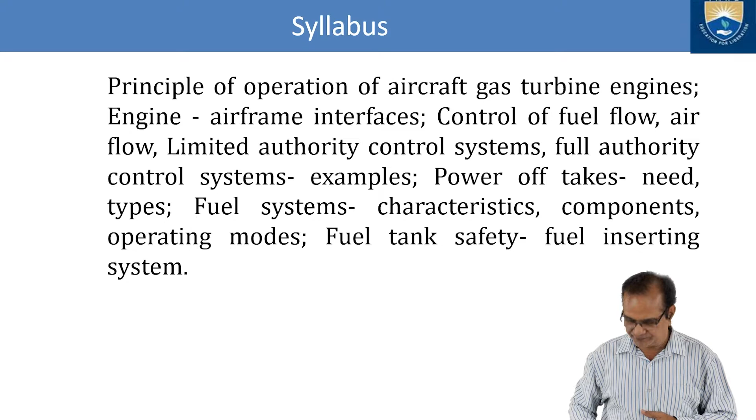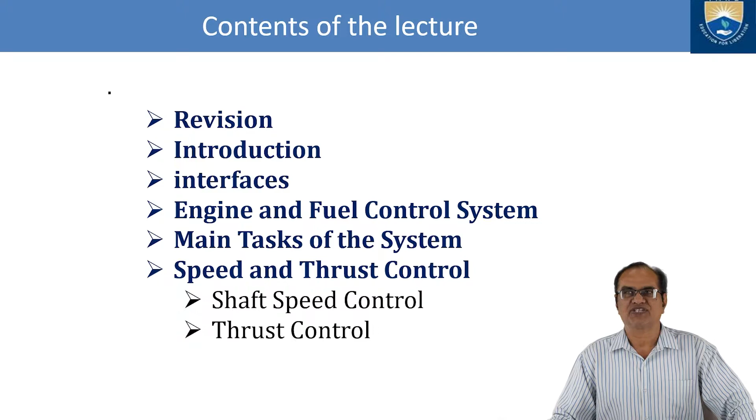In today's class, I am going to cover the revision, then introduction, interfaces, engine and fuel control systems, main tasks of the systems, speed and thrust control, shaft speed control and thrust control. So these topics I am going to discuss.

First I am going to take up the revision of the previous classes. In this revision we have seen that there are 4 pillars of aircraft systems: first is the airframe or structural system, another is vehicle system, third is avionics system, and fourth is mission system. These are the 4 important pillars on which the building of the aircraft rests.

If you take the first pillar, it is the airframe systems or airframe and structural system. In this we have the wing, another is the empennage, and third is the fuselage. Next one is the vehicle system. The vehicle system consists of the fuel system, propulsion system, flight control system and hydraulic system.

You might have seen that we have covered the hydraulic system, but the fuel system and propulsion system will be covered in this module, module number 4, and the flight control system will be covered in module 5, the last module. So we are going to cover these, and I am going to assume that you are all aware about the propulsion system and the fuel system.

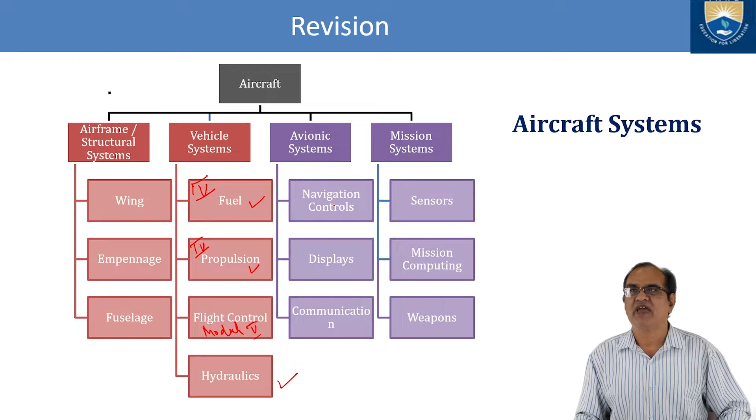Now I will discuss some components of the aircraft. I will start from the cockpit, where the pilot sits. Here all the instruments, navigation and communication equipment are fitted, and all displays are here.

This full body is the fuselage. Then we have the slats here, which increase the lift. We have the spoilers here, which change lift, drag, and the roll.

Then we have the aileron. The function of the aileron is to change the roll of the aircraft. Then we have the flaps here, here and here - these are the flaps, and this one and this one are the ailerons. These are the winglets, and here is also a winglet. The purpose of the flaps is to increase the lift and the drag of the aircraft.

Then we have the elevator. The elevator is used to change the pitch of the aircraft, meaning it will make the nose go up or down - like this.

The rudder is deflected to make the aircraft yaw towards the left or right side of the pilot. The vertical stabilizer controls the yaw - it is used to stabilize the yaw motion, meaning there should not be an immediate reaction. If you apply the rudder, after deflection it should maintain the proper position. Then we say the aircraft is statically stable in the yaw axis.

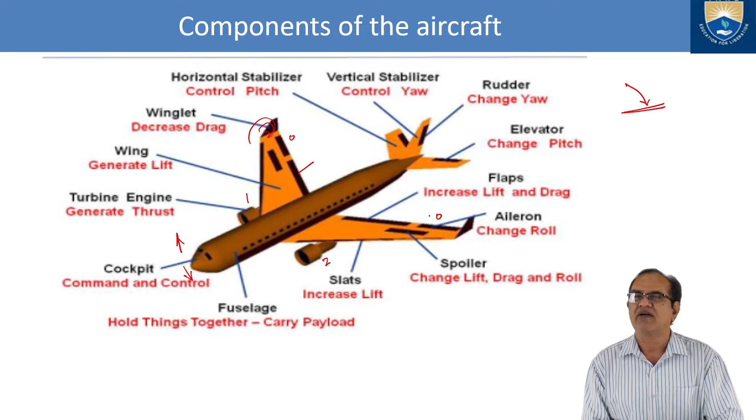Next is the turbine engine here - you can see turbo engine 1 and turbo engine 2. These are the engines, and now I have completed all the parts shown here.

Now I will discuss the airframe system. If you talk about the airframe system, we have three main components: 1, 2 and 3. The first one is the wing, and the wing has got so many components - here this is the airfoil, and then the center wing.

Then we have the exterior plate doubler, then the landing gear fitting, trailing edge, inboard flap, flaps, vane, spoilers, inboard ailerons, outboard ailerons, flaps - these are all part of the wing.

If you talk about the fuselage, we have section 1, section 2, section 3 and section 4. Section 1 is called the forward section, and section 2 is called the mid section.

Then section 3 is called the aft section, and this is called the afterbody. The afterbody is also called the empennage. So the empennage is also part of the fuselage, but it is the last part of the aircraft. The third part is the empennage. The empennage consists of the afterbody.

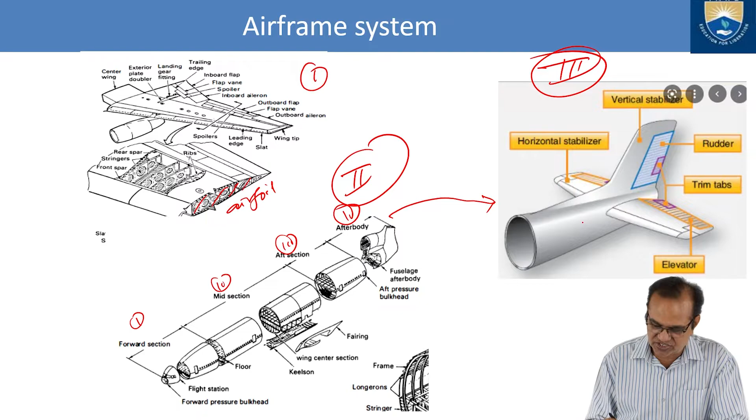This is your afterbody here, and then it consists of the horizontal stabilizer. Then it consists of the rudder. Then it consists of the trim tab. So these are the parts of the systems.

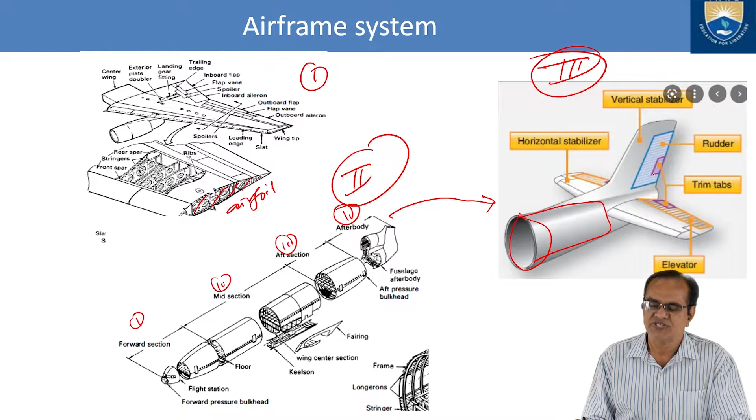Now, vehicle system. If I talk about the vehicle system, you can see here in the video how this animation is moving. So here are the flight controls. If you see here, these are the controls. If you want to roll, your aileron has to go up and down. And if you want to pitch, your elevator has to go up and down here. These are the pitch here.

And if you want to yaw, then you have to use your pedals. I will show you here how the pedals work. These are the pedals, and these are pressed by the pilot. So here we have the primary flight controls: roll, pitch and yaw. Just now you can see in this animation how this aircraft is moving left, right, up and down, or yawing. Secondary flight controls are the high lift controls, flaperons and the slats, and then we have the speed brakes.

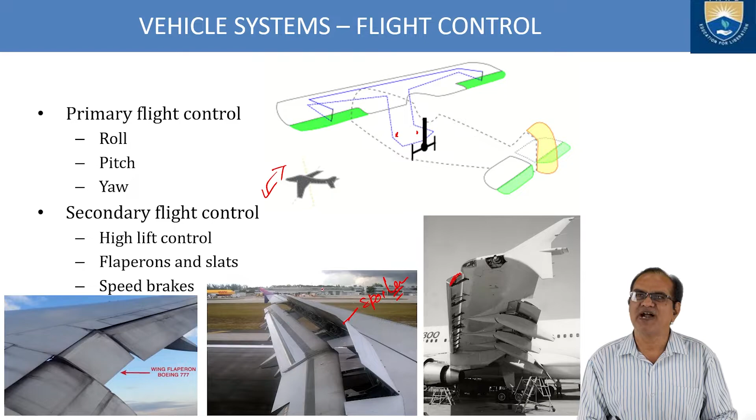So these shown here are slats. These are the slats, here. If you see, these are the air brakes, spoilers. Okay, wing flaperon, Boeing 777, and all these parts are shown in this slide.

Next vehicle part is the propulsion system. We are here in module 4, and in this we will be discussing the propulsion system of the aircraft. I will not go in much detail, but we should understand that the propulsion system is also part of the vehicle system. And propulsion means what? It has to pull the aircraft. It has to make the motion. So locomotion is performed with the help of the aircraft propulsion system.

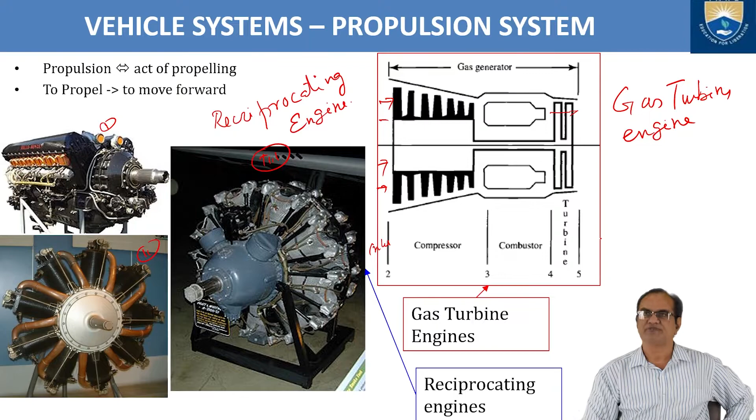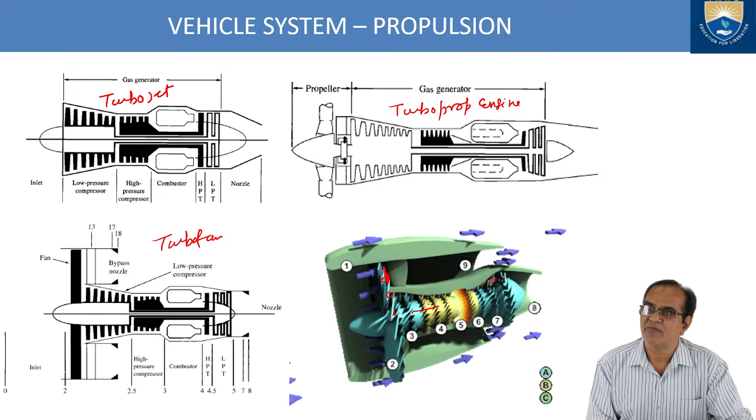Air is entering from this side, and some part of this air is bypassed by the turbofan and some part enters the main engine. This is your main engine here. Here is the compressor. By the color you can see that pressure is increasing. Here the red color shows high pressure, and after that the combustion takes place in this zone. In the combustion zone, high temperature, high pressure air enters the turbine. So these are the zones: 2, 3, 4, 5, 6, 7, 8.

So 2 is your fan, 3 is your low pressure compressor, 4 is your high pressure compressor, 5 is your combustion chamber, 6 is the high pressure turbine, and 7 is the low pressure turbine. So the basic concept of the turbine is shown with the help of this animation, which I have taken from the internet. It is not mine. I will give credit to the person who made this animation.

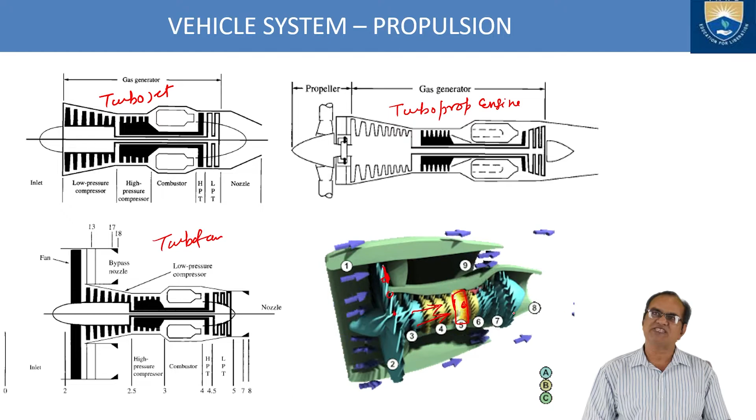Now in the vehicle system, after this engine system, we should also have the fuel system. I will be discussing this fuel system in detail in due course of time. This fuel system provides a reliable supply, ground refueling, ground defueling, in-flight function. It gives the fuel transfer, engine feed, fuel measurement, fuel management, fuel jettisoning.

So here I have shown the fuel jettisoning, how this fuel is jettisoned. If during landing the aircraft is not properly balanced... So we have to make sure that the aircraft is balanced during landing, and if on any one side the fuel is more, that side's fuel is jettisoned or removed. In some aircraft this is done automatically, and in some aircraft the pilot will operate the jettison system and the fuel will be jettisoned.

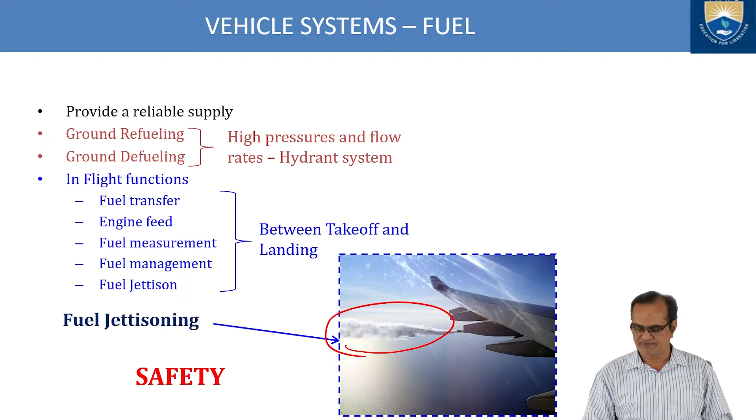Now here is a new topic which I am going to take you through for module 4. Here I am going to talk about the engine control system. This allows the engine to perform at maximum efficiency for a given condition. So this engine control system, what is the purpose? It allows the engine to perform at maximum efficiency. Everything should work at maximum efficiency for a given condition. It aids the pilot to control and monitor the operation of the aircraft power plant.

Originally, the engine control system consisted of a simple mechanical linkage controlled by the pilot, then evolved and became the responsibility of the third pilot, a certified crew member, the flight engineer. So if you see the old aircraft, I have seen the IL-38 in the Indian Navy and the Tu-142M. Both aircraft had one additional person, which is called the flight engineer.

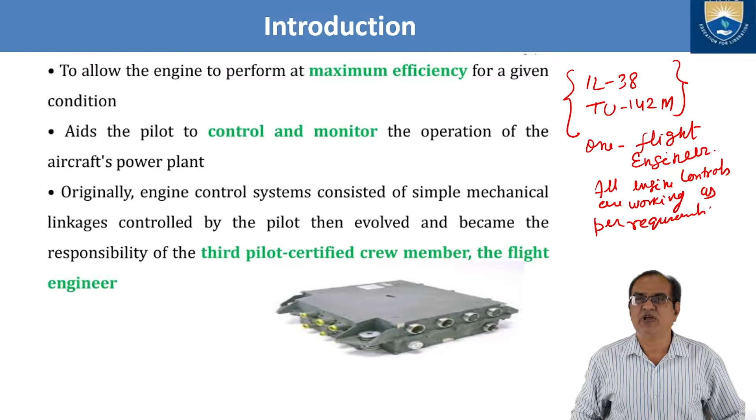This is the person who is the engineer; he is not the pilot, but he is flying with the pilot, and he is making sure that all engine controls are working as per requirements. Okay, so the engine control system previously consisted of a simple mechanical linkage operated by the pilot, then evolved and became the responsibility of the third pilot, certified crew members, the flight engineers.

By moving a throttle lever directly connected to the engine, the pilot or the flight engineer could control fuel flow, power output, and many other engine parameters. What is the purpose of the flight engineer? He will maintain that fuel flow is as per the requirement. Next, he will maintain the power output of the engine as per the requirement, and many other engine parameters the flight engineer has to monitor, and he or she has to make sure that these parameters are maintained inside the aircraft so that the aircraft performance is achieved as per the given standard.

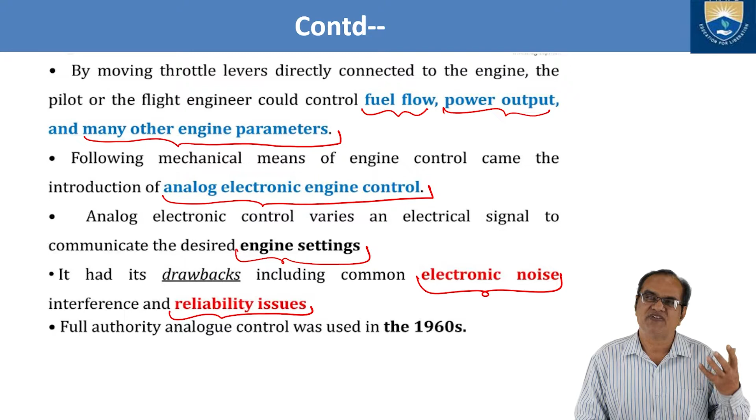Following mechanical means of engine control came the introduction of analog electronic engine control. After that, analog electronic engine control came, and it made the electronics work. Analog electronic control varies an electrical signal to communicate the desired engine setting. So it works with the help of the electric signal. It had its drawbacks, including common electronic noise interference and reliability issues. So it had reliability problems, and also some disturbance or noise, which is interference due to electromagnetic waves and others.

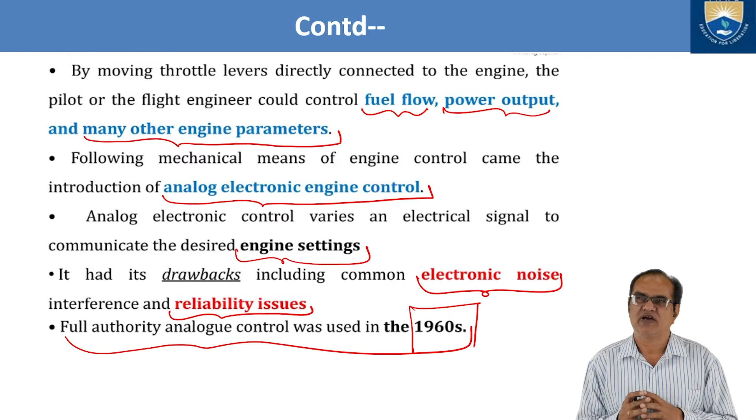So now full authority analog control came in 1960. The first electronic control with all the parameters which can be controlled came in 1960. In 1970, NASA and Pratt & Whitney experimented with the first experimental FADEC, full authority digital electronic control. What is the FADEC? It is a full authority digital engine control. First flown on the F-111, fitted with a highly modified Pratt & Whitney TF30 left engine.

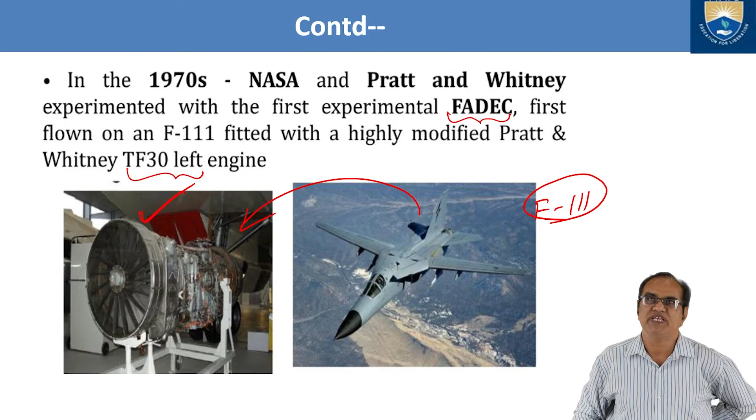So this is the TF30 engine which is shown here. This is the TF30 engine, and this is the F-111 aircraft. In this aircraft, this engine has got the full authority FADEC system. It was used in 1970, and it was developed by NASA and Pratt & Whitney of the USA.

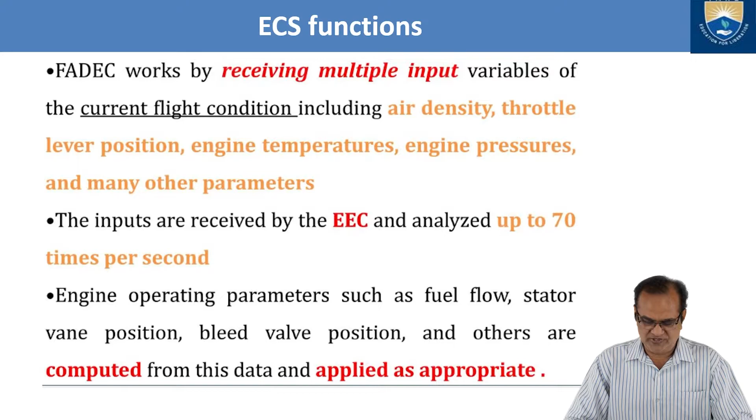Now, electronic control system functions. What are the functions of the electronic control system? FADEC works by receiving multiple input variables of the current flight condition, including air density, throttle lever position, engine temperatures, engine pressures, and many other parameters. The inputs are received by the EEC and analyzed up to 70 times per second. Engine operating parameters such as fuel flow, stator vane position, bleed valve position, and others are computed from this data and applied as appropriate.

It controls engine starting and the restarting of the engine. This FADEC, what is that? FADEC means full authority digital engine control system. This makes sure that starting and restarting is controlled properly.

Its basic purpose is to provide optimum engine efficiency for a given flight condition. So another function of this thing is to provide optimum engine efficiency for given flight conditions. It also allows the manufacturers to program engine limitations and receive engine health and maintenance reports.

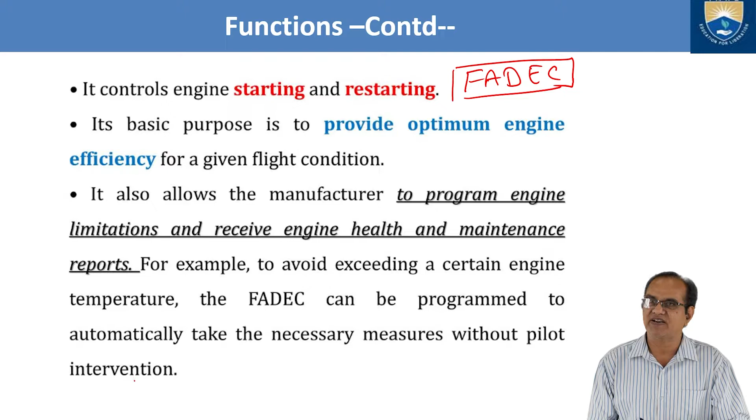For example, to avoid exceeding a certain engine temperature, the FADEC can be programmed to automatically take the necessary measures without pilot intervention. So this FADEC will do its own automated work, but we have to program under what type of condition it has to work. So how does it work, how will your FADEC work?

The flight crew first enters the flight data such as wind conditions, runway length or cruise altitude into the flight management system. The flight management system uses this data to calculate power settings for different phases of the flight. At takeoff, the flight crew advances the throttle to a predetermined setting or opts for an auto throttle takeoff if available. The FADEC now applies the calculated takeoff thrust setting by sending an electronic signal to the engine.

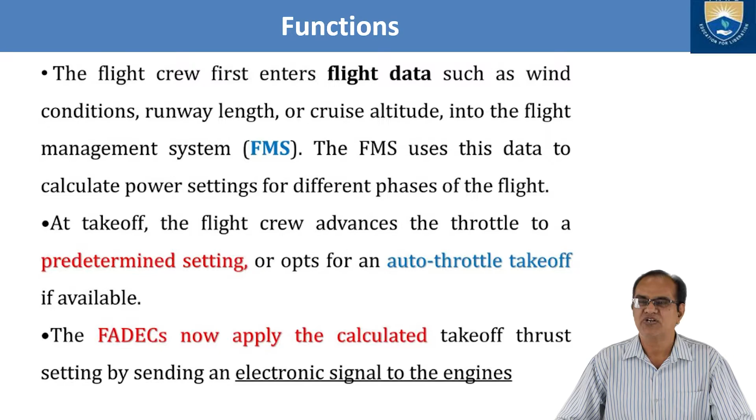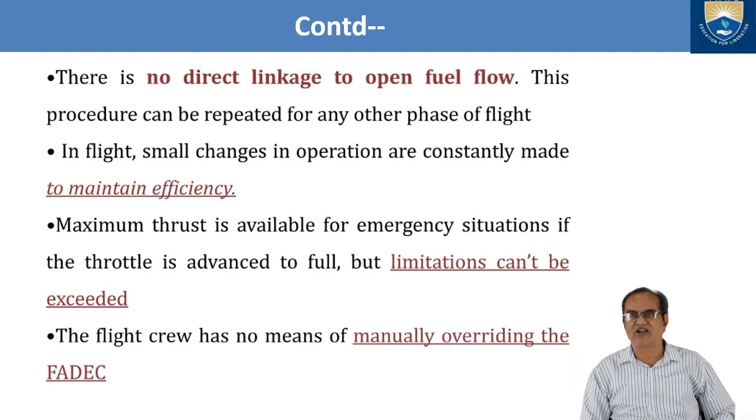There is no direct linkage to open fuel flow. This procedure can be repeated for any other phase of flight. In flight, small changes in operation are constantly made to maintain efficiency. Maximum thrust is available for emergency situations if the throttle is advanced to full, but limitations cannot be exceeded. The flight crew has no means of manually overriding the FADEC. Once it is programmed, the flight crew will not have any control over the FADEC system.

True full authority digital engine controls have no form of manual override available, placing full authority over the operating parameters of the engine in the hands of the computer. The pilot, the co-pilot or the flight engineer don't have any authority or any interference on this FADEC system. The FADEC system will work as per the given input and no one can interfere with that.

If a total FADEC failure occurs, the engine fails. That is a major drawback. So if the FADEC fails, the engine will also fail. If the engine is controlled digitally and electronically but allows for manual override, it is considered solely an EEC or ECU. So what is the difference between the FADEC and the EEC or the ECU, electronic control unit?

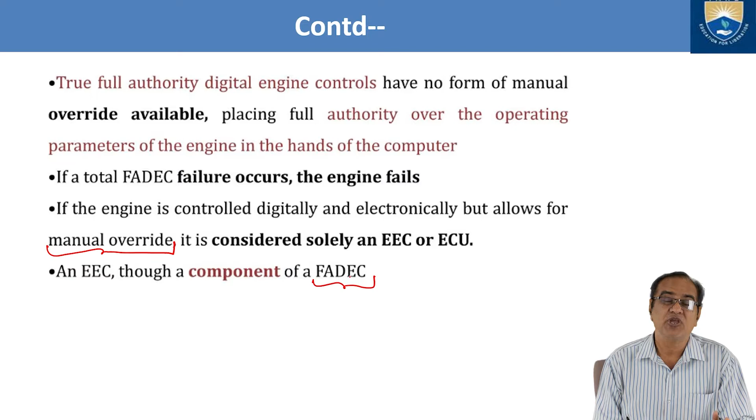In this, the engine is controlled digitally and electronically but allows for manual override. So if this system is there, it is not called FADEC. It is called only EEC, electronic engine control, or electronic control unit. And the EEC is a component of the FADEC. There are a number of parts in the FADEC; the EEC is one part, and the FADEC is controlled by a fully computerized system by the flight management system of the aircraft.

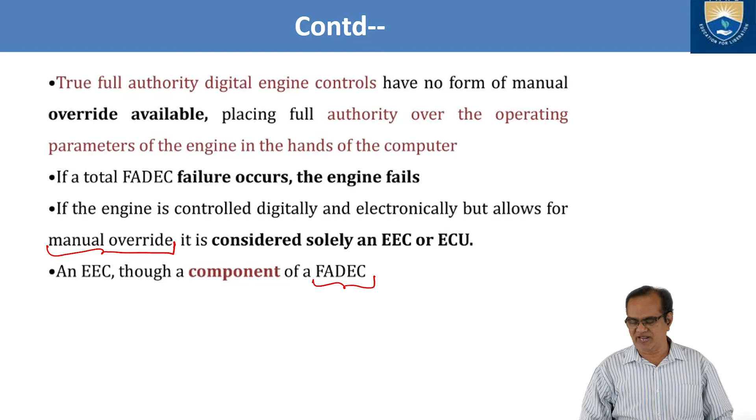So what are the applications of electronic control systems? Till now we have seen how it operates and what its functions are, but what are the applications of this engine control system? FADECs are employed by almost all current generation jet engines and increasingly in piston engines for fixed wing aircraft and helicopters. So now it is used for piston engines, for helicopters, everywhere.

The system replaces both magnetos in piston engine aircraft, which makes costly magneto maintenance obsolete and eliminates carburetor heat, mixture control and engine priming. So FADEC has made the piston engine very efficient. Magnetos need a lot of maintenance and cleaning. Every 200 or 300 hours of flying, you need to remove the magnetos and clean off the carbon or any other particles which have accumulated.

Otherwise, it will not give proper efficiency. The engine will not perform as per the required standard. All these things are eliminated with the help of FADEC. Also the carburetor heat.

Every piston engine will have the carburetor. In the carburetor, you mix the fuel and the air. It has to give a proper ratio. And this maintenance is also very difficult. By using the FADEC, all these maintenance issues are solved.

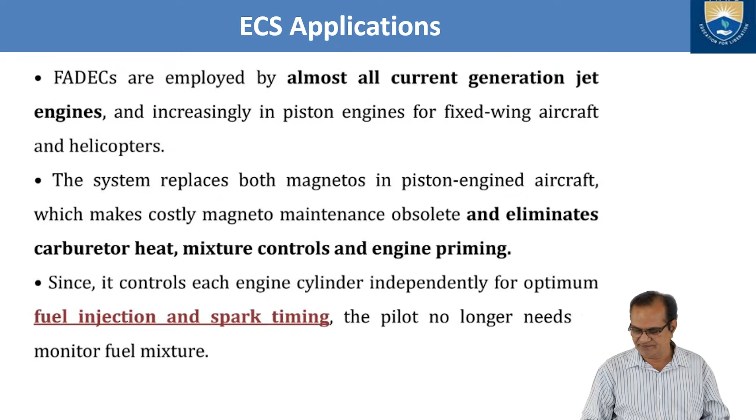The flight management system makes sure that the spark is given at the exact required timing of the engine. So all these things are performed, and these applications are done by the ECS.

What are the advantages of the electronic control systems? Better fuel efficiency, automatic engine protection against out of tolerance operations, safer as the multiple channel FADEC computer provides redundancy in case of failure, carefree engine handling with guaranteed thrust setting, ability to use a single engine type for a wide thrust requirement by just reprogramming the FADEC, semi-automatic engine starting, and better system integration with engine and aircraft systems.

So these are the advantages. First, it gives better fuel efficiency. It means the fuel consumption is reduced. So how is the fuel consumption reduced? Because it gives the correct timing of the spark plug, as I just told, and it gives the correct air to fuel ratio. All these things make the engine very efficient.

Automatic engine protection against out of tolerance operation. Suppose your engine is to operate at 400 degrees centigrade, and due to some problem the temperature has reached 500 degrees centigrade, it will protect. There are some mechanisms that will try to bring the engine back within the required limitations. Tolerances should be within the limit. So that is the purpose of the FADEC, and FADEC makes this perfect.

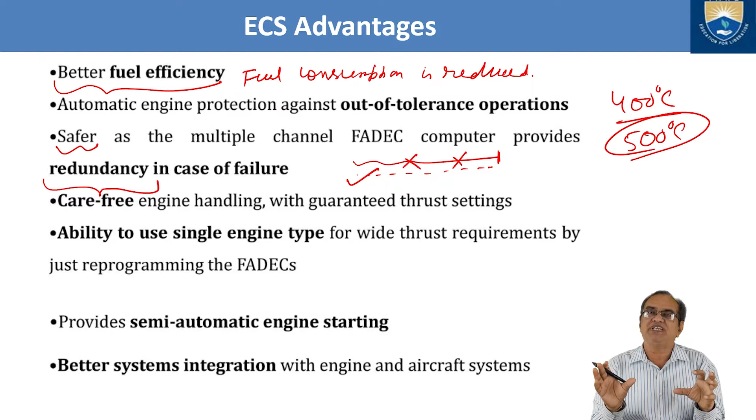Carefree engine handling with guaranteed thrust setting. You know that at a particular altitude, speed, and weight of the aircraft, we need a certain amount of thrust from the engine. This engine will make sure that in those conditions, the required amount of thrust is produced. So the aircraft will fly at optimum conditions where fuel consumption is reduced and optimum fuel consumption is maintained by the FADEC system.

Provides semi-automatic engine starting. Sometimes if you want the pilot to interfere during starting, there is a provision. If the pilot sets that knob, the pilot can start, or it will be an automatic setting. This can be done.

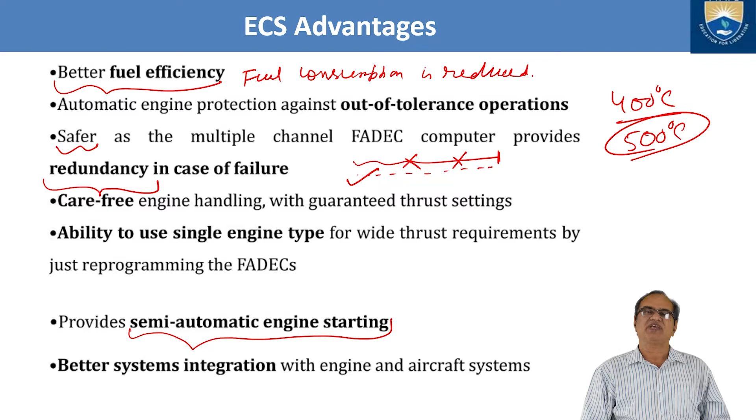Better system integration with engine and aircraft systems. It makes better engine integration with aircraft fuel systems, the fuselage, wings and other things. A better condition can be achieved. So these are the advantages of the electronic engine control system.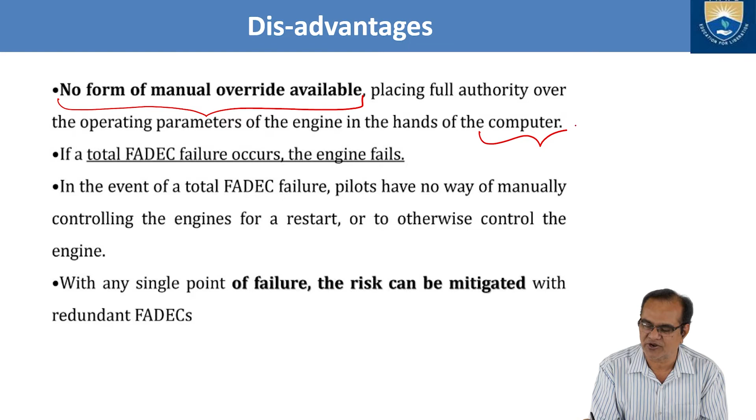But everything is not good. If you have something good, there will be something bad. So we also have to see what the disadvantages of the FADEC system are. No form of manual override is available. Once it is set, you cannot do anything; only the machine will do it. It places full authority over the operating parameters of the engine in the hands of the computer. Everything is controlled by the computer, with no human interference.

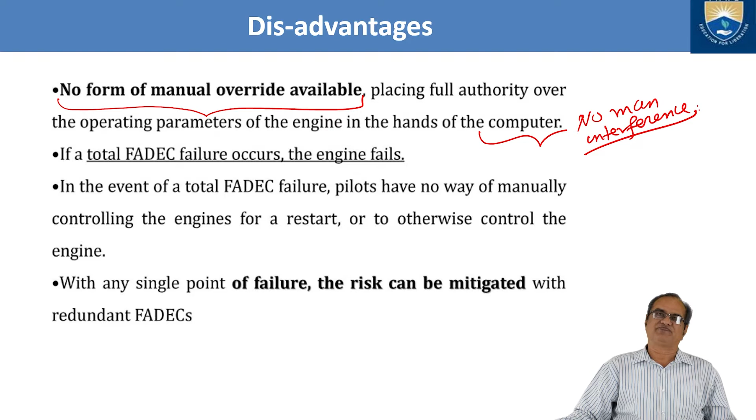No interference is needed at any level. If a total FADEC failure occurs, the engine fails. So, if the FADEC fails, no one can save the engine. The engine will 100% go bad. In the event of total FADEC failure, pilots have no manual way. The pilot cannot do anything. The pilot has no option.

Okay, so the pilot has no option. So that is the drawback of this system: manually controlling the engine for a restart or to otherwise control the engine. With any single point of failure, the risk can be mitigated with redundant FADEC. So the risk can only be mitigated by the given standby system, not by the pilot.

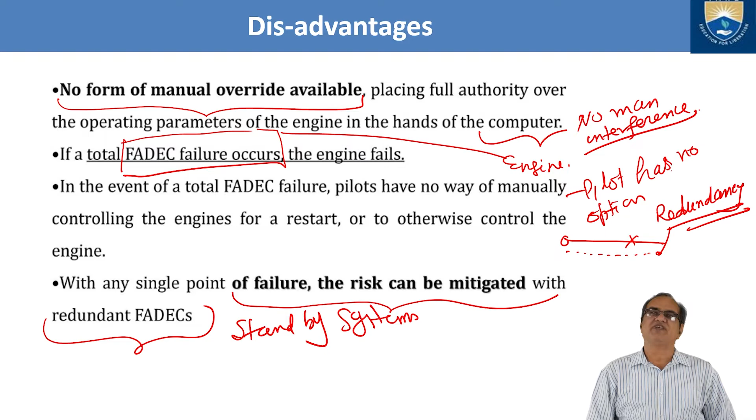A redundant system is what? Standby systems, as I have told just now. If you have one system to operate this lever and it fails, there is another parallel system which will operate for the time being. This is called redundancy. So the redundancy of this system is quite high, and so these are some of the disadvantages.

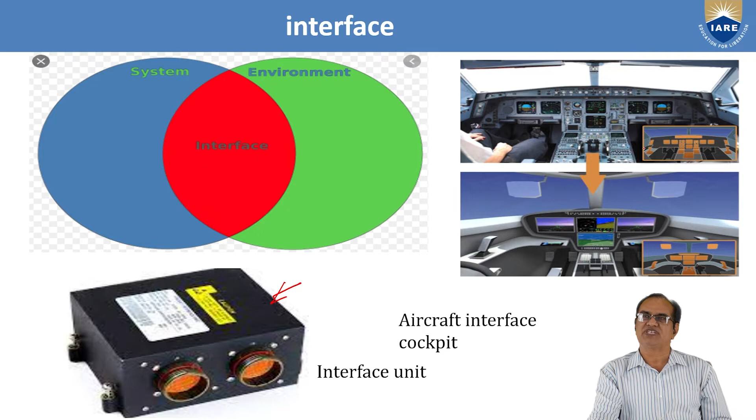So now I will talk about the interface. What is the interface and how are these things working? How are your engine control systems interfaced with the aircraft? The system here is the environment, and there is an interface, called the interface unit, the aircraft interface. Here is the pilot. So your engine, your environment, and there is an interface. This unit makes sure that what the pilot wants is obtained by the engine. Here in this cockpit is the pilot, and the pilot makes sure that the systems are interfaced properly and he or she is able to perform as per the required standard.

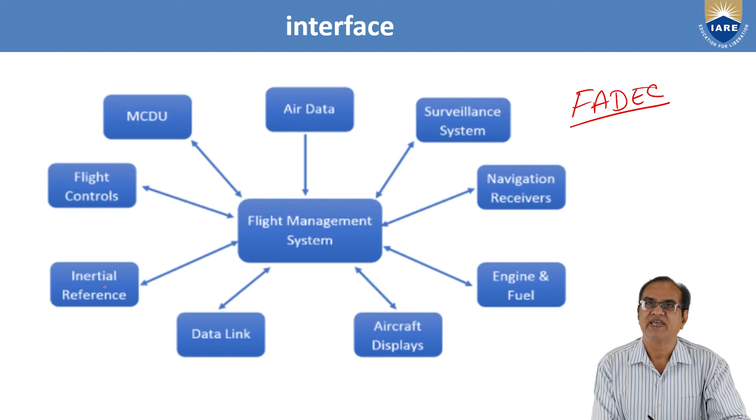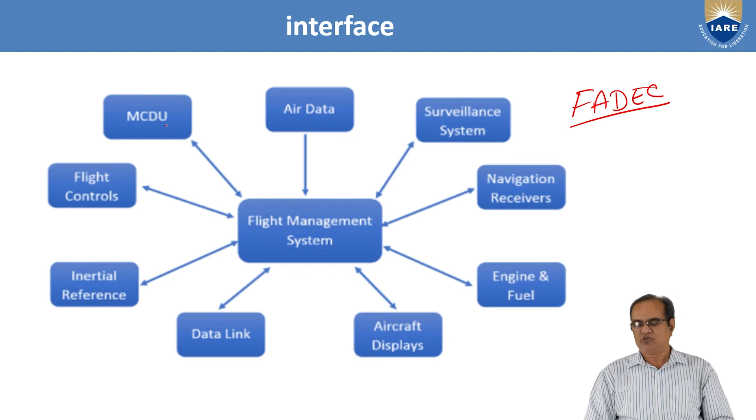For the interface, we have the flight management system. The flight management system is a very important component, and it is computer operated. It will take data from air data. It will give and take from the surveillance system, navigation receiver, engine and fuel, and aircraft displays. These are the aircraft displays. Here we have the data link, the inertial references, the flight control, and the MCDU, the multipurpose control and display units. These are used for interface systems.

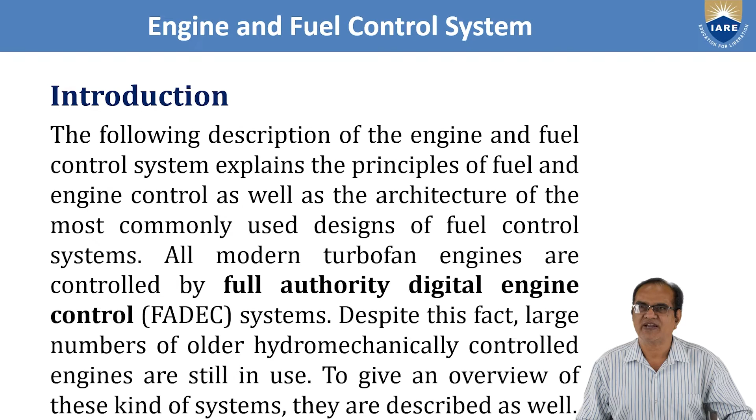The main task of the engine and fuel control system is metering the fuel flow to the combustion chamber under the operating conditions of steady state, acceleration and deceleration. The system must achieve this with the aim to keep the engine at the thrust level demanded by the pilot and to prevent exceedance of the operating limits. Limiting functions ensure operation within the limits for shaft speed, temperature, and pressures. So it has to make sure that the speed, temperature, and pressure are within the limits.

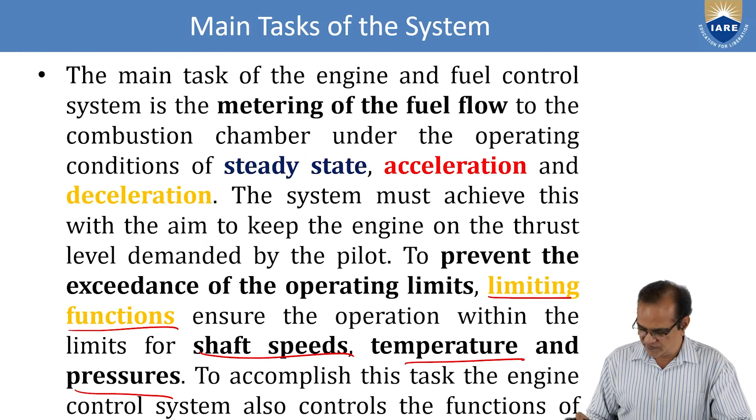To accomplish this task, the engine control system also controls the functions for speed and thrust control, how we do the speed and thrust control of the engine. For the control principle of a turbine engine, shaft speed and thrust are the two most important parameters. The simplest control system is a shaft speed control system. As long as the power lever angle is constant, it keeps the shaft speed constant. A typical application for a constant shaft speed control system is the APU, auxiliary power unit.

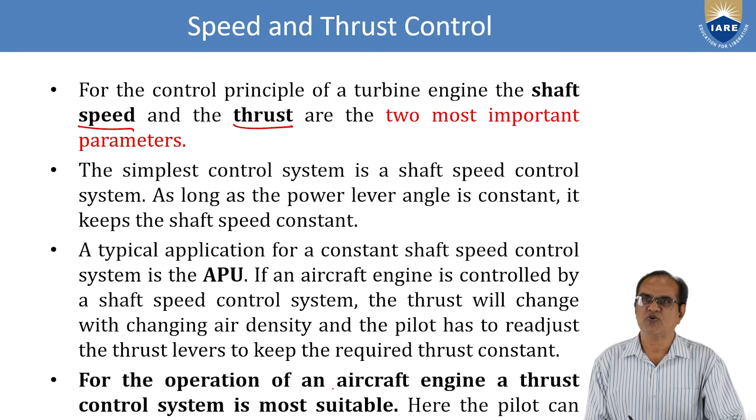The fuel control unit FCU uses a speed governor to adjust the shaft speed to the value demanded by the input of the power lever. This I will be discussing in detail with my own experience in the next classes as and when permitted. The fuel flow for acceleration must be between the steady state line and the surge limit.

For deceleration, the fuel flow must be between the steady state and the flame out. So here you can see we have the two limits. This is the steady state. If you want acceleration, it can go up to this limit, but if you want deceleration or reduced speed, it should not go below the flame out limits.

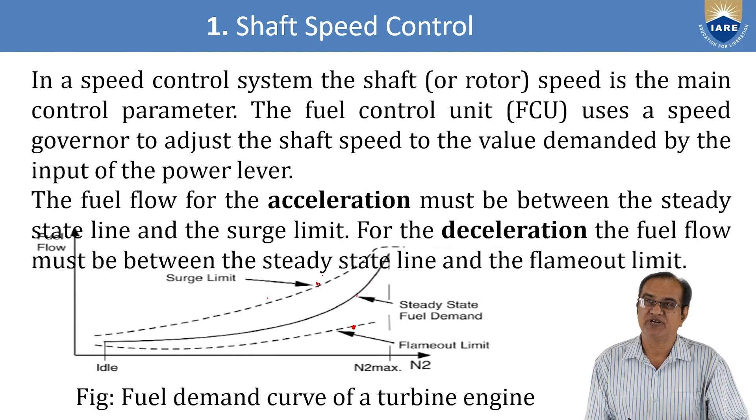So these are the limits which the aircraft and engine has to maintain, and this is done with the help of the FADEC, full authority digital engine control system. It is called FADEC. This FADEC is doing this work.

To adjust the calculated fuel flow to the current air density at the combustor inlet, the FCU needs at least the input of the compressor inlet temperature and the compressor discharge pressure, CDP or PS3, in addition to the N2 speed and the power lever input. With these inputs, a simple speed control system can operate.

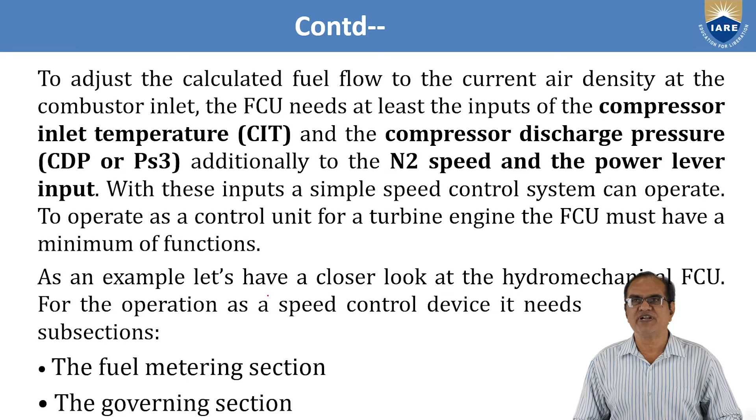To operate as a control unit for a turbine engine, the FCU must have a minimum of functions. As an example, let us have a closer look at the hydromechanical FCU. For operation as a speed control device, it needs two subsections: the fuel metering section and the governing section. You can see this in the diagram.

Here we have the start lever for fuel shut off. Here we have the power lever, which goes to the governing section. There is a limiting section, here is the computing section, and here we have the metering section.

Here we have the speed N2, here we have the PS3, and here we have the temperature T25 from the engine, and fuel going to the engine. This N2, this pressure, and this temperature will be sensed by this unit, called the fuel control unit.

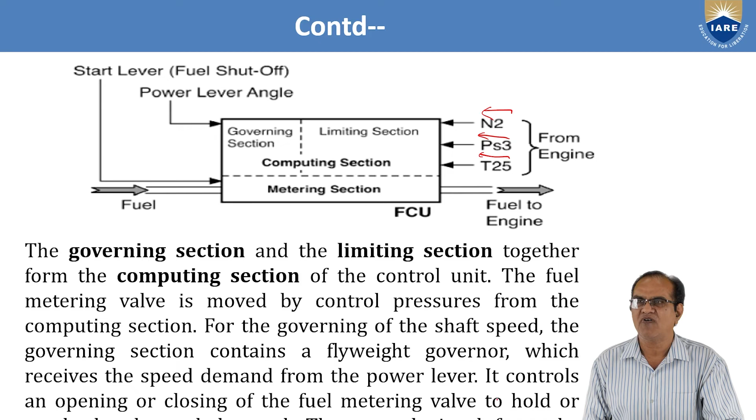Now, thrust control of the aircraft - how we can control the thrust. For thrust control, the control system uses a main control parameter which is directly related to the thrust of the engine. This parameter can be the N1 speed of the engine, or pressure ratio EPR. Which of the two is used depends on the philosophy of the engine maker.

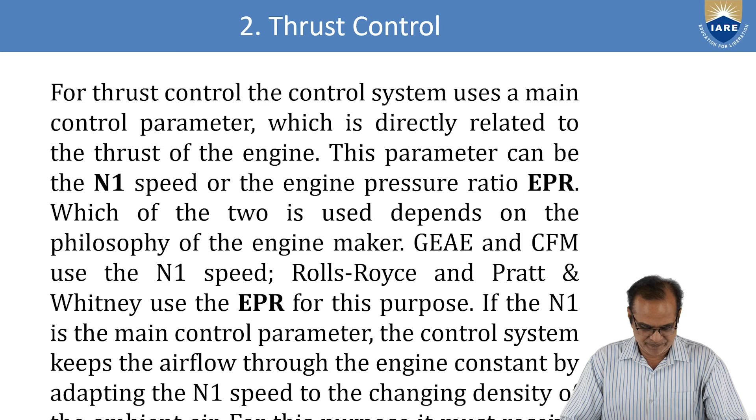GEAE and CFM use the N1 speed. Rolls-Royce and Pratt & Whitney use the EPR for this purpose. If N1 is the main control parameter, the control system keeps the airflow through the engine constant by adjusting the N1 speed of the engine.

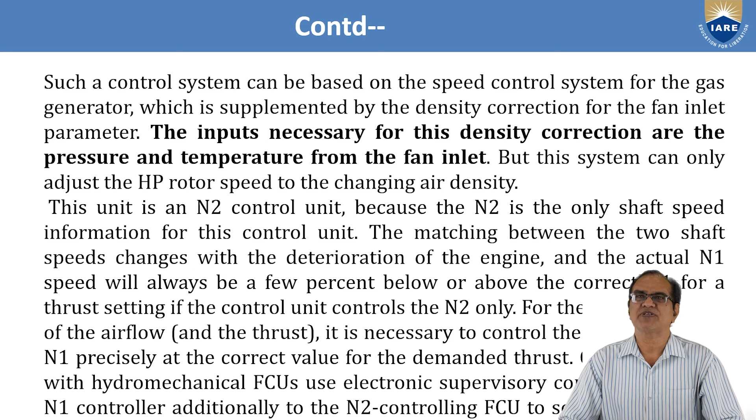Such a control system can be based on the speed control system for the gas generator, which is supplemented by the density correction of the fan inlet parameter. The inputs necessary for this density correction are the pressure and temperature from the fan inlet, but this system can only adjust the high pressure rotor speed to the changing air density.

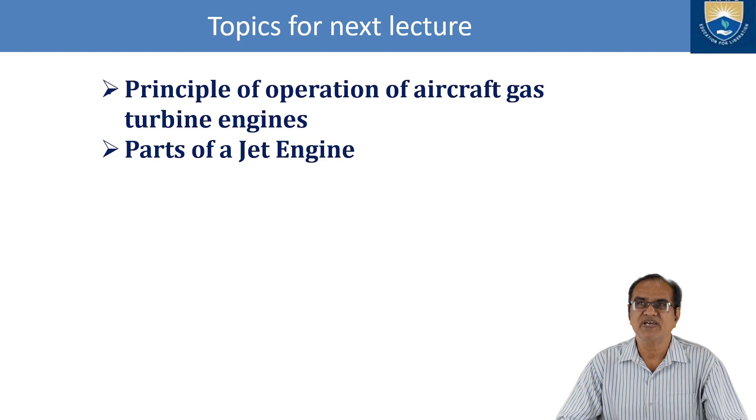So this is the same as what I have already explained. I am ending here. I will talk in my next class about the principle of operation of the aircraft gas turbine engine and the parts of the gas turbine engine. Here we have the references from Moir and Seabridge.